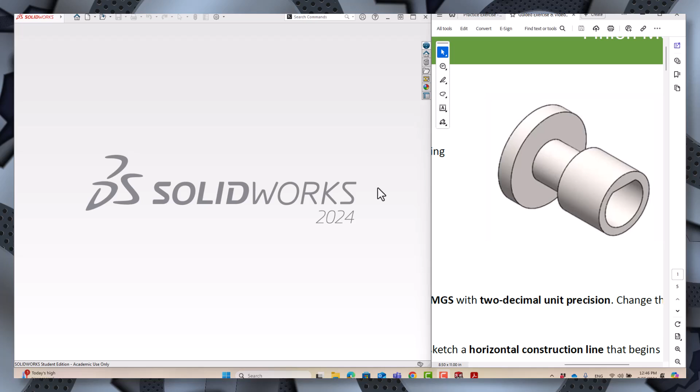Welcome again, MEEN210 class. In this video, I will be solving the parts exercises that I provided you during the last lab session. We will start with this part, the pinion mount. So,

as you see here, the part in itself is very simple. If we divide it into sections or features, let's say, we can divide it into 1, 2, 3, and 4 different features. There's this base disc, and then there's this intermediate cylinder, and this top cylinder, and then there's an extruded cut from the right hand side.

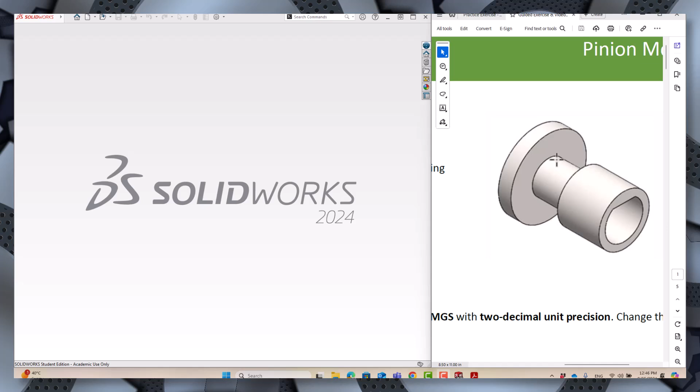As we discussed during the lab, there are multiple approaches that you can follow to build this part. One of them would be by sketching circles and extruding them one by one until you achieve the full geometry, and then on the right hand side face, you can draw this profile and then extrude cut towards the inside. Although this approach will require that you make the part using 4 different features.

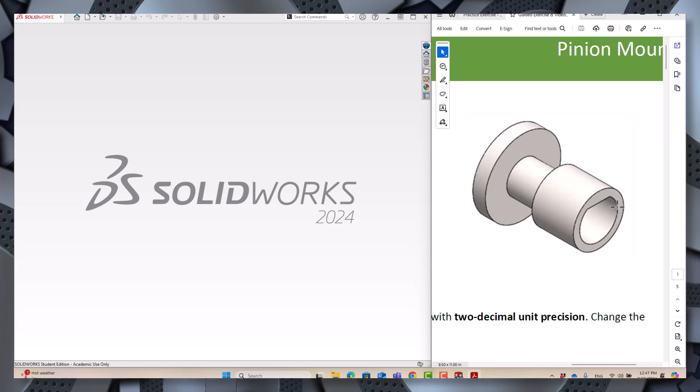There is another faster approach, and this would be by using a revolved sketch, like what we discussed during the lab session. So if you draw half the profile or half the cross section of this part and you revolve it around the longitudinal axis, you will get the exact same result just in one feature, and the last thing you need to do would be the extruded cut. So let's get started on doing this. So we will be doing this shape.

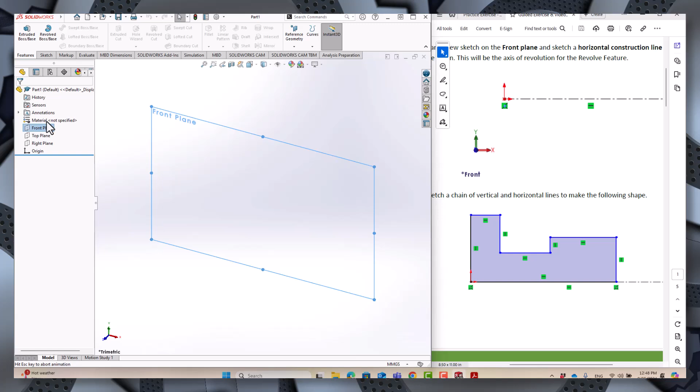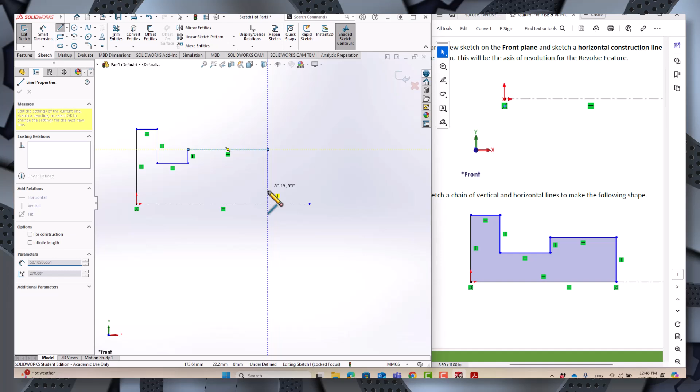I'll go and start a new part. You need to make sure that the unit system is the one that's required, and in our case it's MMGS, or millimeters. And I will pick the front plane. I will start a new sketch. And I will start by drawing my axis of revolution, which will be defined by a center line. Next, I will use the line tool to draw the profile approximately. Then, as usual, we will refine it using the dimensions and relations if needed.

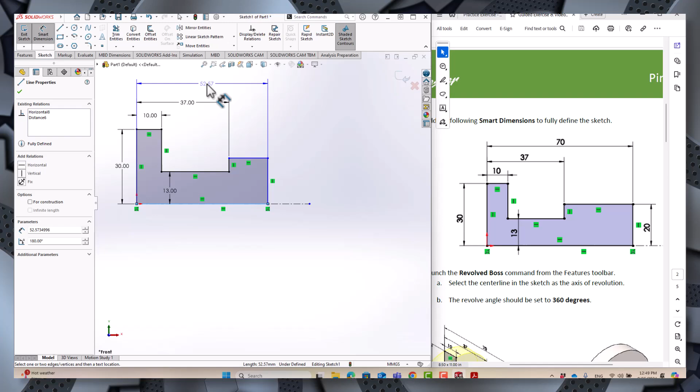So here is a closed profile, and on the next page you will see all the dimensions, and I will simply replicate those. This is 30, this is 10, here 13. And as I always emphasize, please try to put the dimensions on your sketch in the same arrangement and also in the same place if possible as the ones provided in the drawings, because this will make it a lot easier for you to review and spot if you have any mistakes or any missing dimensions.

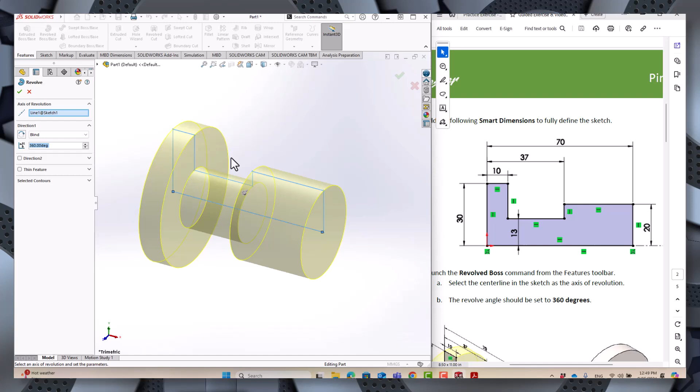Okay, so here I think our dimensions are fine. Our sketch is fully defined. We can exit, select revolve from the features. It will show us the preview. If you accept this result, you can click OK, and here is the part.

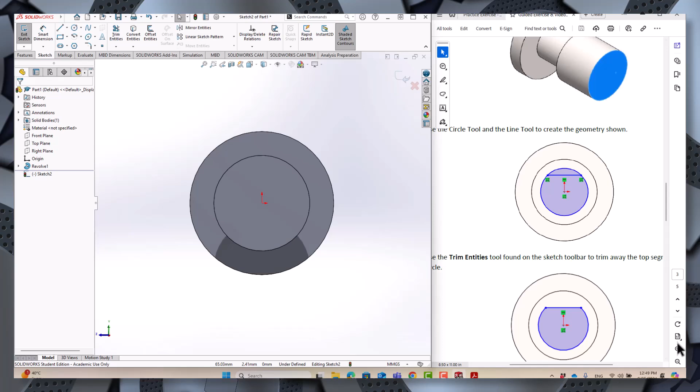The next step would be picking this face and starting a new sketch, and we will need to draw this incomplete circle. So we'll draw a circle, and then we'll draw a horizontal line touching the circle perimeter on both sides. Then we will trim away the unneeded part of the circle.

So with the circle command active, I will touch the circular edge of the face, and this would highlight the center point. Then you can go and click that center point to snap the center point of your new circle to it, and then go to the line tool. I will start from one side towards the other side, and I was careful enough to follow the horizontal guideline. So here my line came out horizontal. If the horizontal relation was not automatically added, you can simply select your line and make it horizontal.

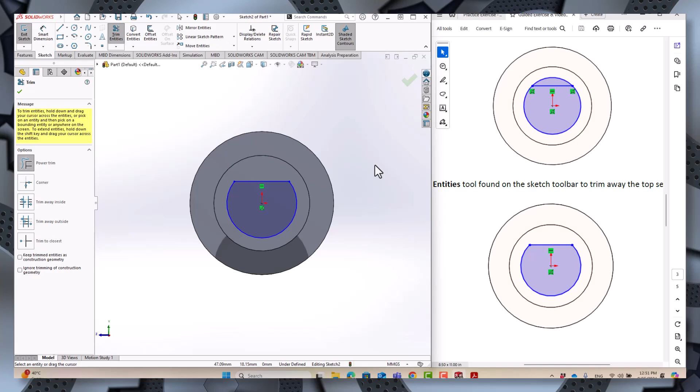Then I will go to the trim entities tool, and I will need to delete the extra part or the top part of the circle. And I would do this with the power trim selected. I will click outside in the background and then cross the arc that is not needed. And this would give us the shape that is required.

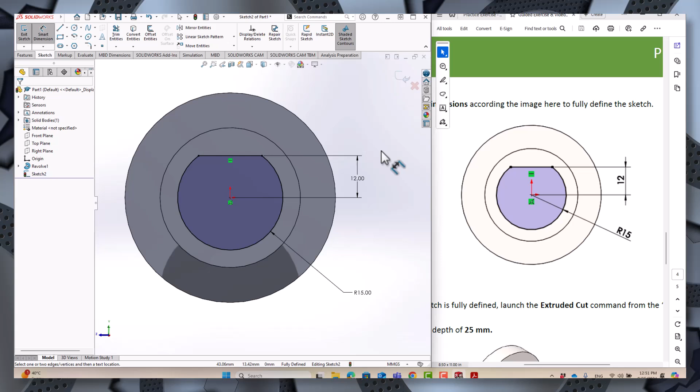The final step would be adding the dimensions to this sketch. So we have the radius here of the arc equals 15, and the distance between the horizontal line and the center point is 12. So with the Smart Dimension tool, I will add a radius of 15, and I will add the distance from the line to the center point as 12. Sketch is fully defined. We can exit.

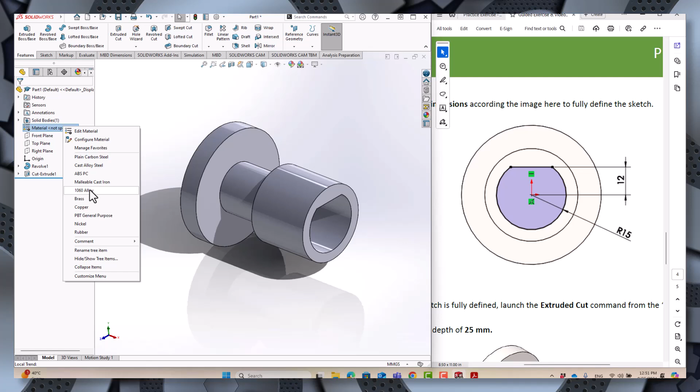Now we need to remove material with this sketch, so I will extrude cut with a depth of 25 millimeters. And this would be our final completed shape. For a self-check, apply a brass material. So go to the materials line, right click and select brass from the favorites. Don't worry if your part looks a bit different than mine. It's fine. These are some graphical differences.

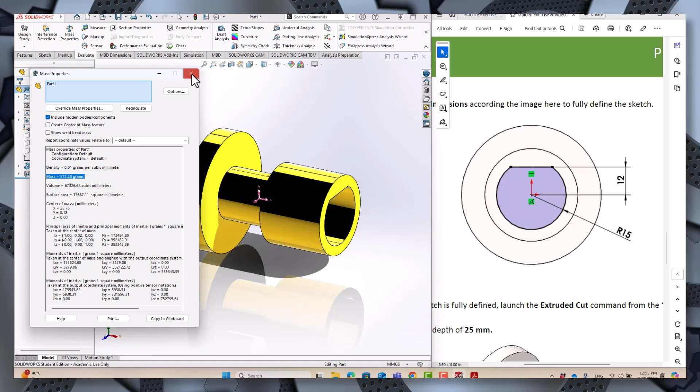So after applying the material, we go to the Evaluate tab, select Mass Properties, and make sure that your mass is 572.28 grams. If you got the same mass, then you have followed the steps correctly. And this concludes the steps to create this part. I hope it was clear enough.

Moving on to the next exercise, which is the pressure disc. This is the required part to build. It's a fairly simple shape, but slightly different. Our previous part was a solid part with a straight extruded cut, but this part is a hollow part, like a cover.

What is common between this part and the previous one is that both are round and both are symmetric about one of the axes, which means it makes sense to create such parts using the revolve tool. Imagine a center line or axis passing vertically through this part, and we can easily draw one half of a cross section and revolve it around that center line.

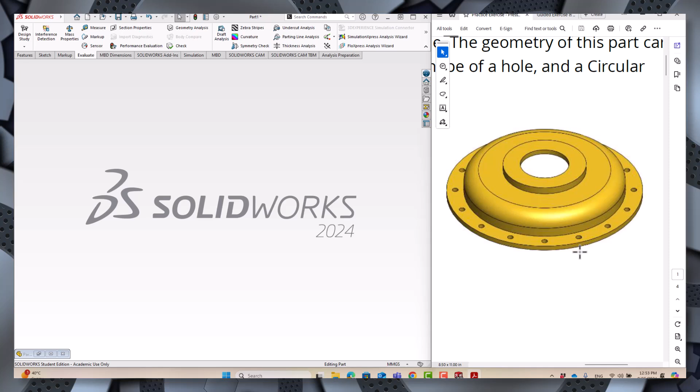But first, let's think about what dimensions or information we need to create this part correctly. We will need the diameter of the inner hole, the diameter of the second hole, the diameter of this cylindrical face, and the outer diameter. We also need the height, the thickness of this part, the thickness of the flange part, and the information about the small holes.

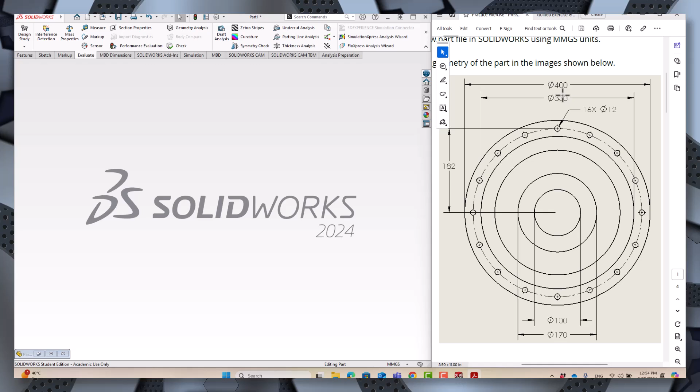If we scroll down in the document, we'll see a few images with some information. Here we have 1, 2, 3, 4 diameters, which are the 4 diameters we need. We also have information about the small holes, listed as 16 times a 12 millimeter diameter, meaning we have 16 copies of those small holes equally spaced around the part, each with a diameter of 12 millimeters.

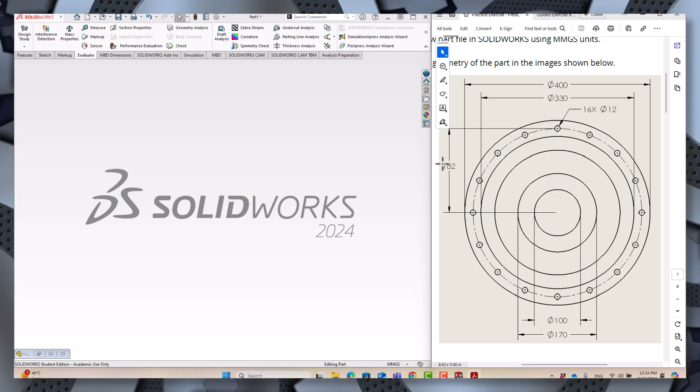The center distance between the small hole and the center hole is 182 millimeters. On the next page, we have two side views. One is a complete side view, and the other is a section view. The complete side view has the total thickness of the part, the thickness of the top cylinder, the radius of the outer curve, and the thickness of the flange.

The lower drawing is a cross section of the part, showing exactly what we need to sketch - only one of those shaded sections. It also shows that the part is hollow, and the wall thickness of the body shell is 10 millimeters. Since all of these are 10 millimeters, this means the line that defines the inner surface is parallel to the lines that define the outer surfaces.

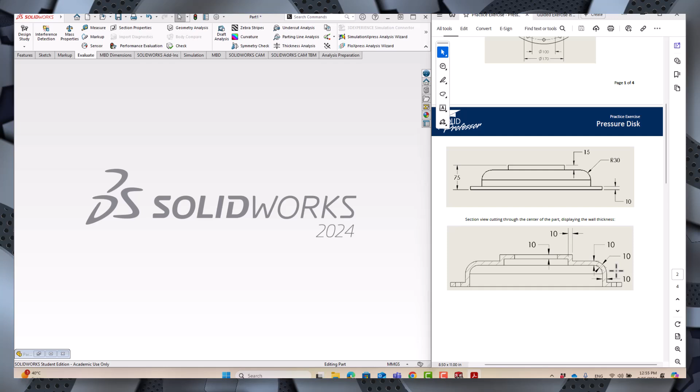Okay, so with this information, let's get started building this part. I will use this sketch, which represents half of the cross section, and draw that in my sketch. I'll start a new part, make sure we're on millimeters system of units, select the front plane, and start a new sketch.

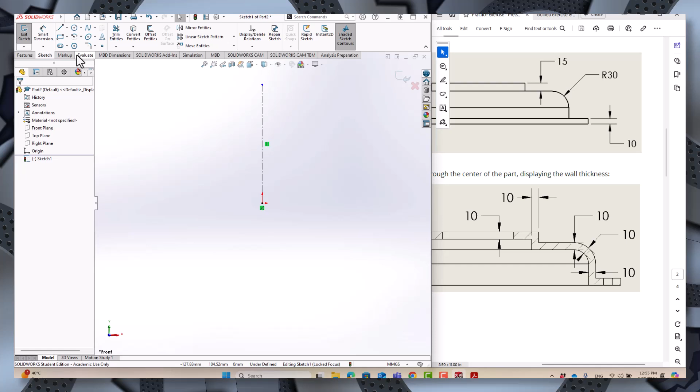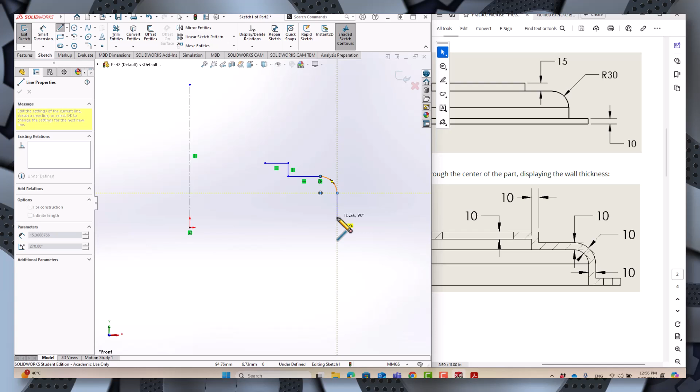I will begin by drawing my vertical axis of revolution as a center line or reference line. Then I'll start drawing the bottom set of lines that define this profile - a horizontal line, a vertical line, another horizontal line, a tangent arc, a vertical line, and a horizontal line, then exit the command.

The next step is that I need to create another copy of this same exact sketch, but 10 millimeters above or below it. You can do this manually, but then you'd need to add the 10 millimeter dimension between each two similar sketch entities, and this is just a time waster.

The faster solution is to use offset entities. If you remember, offset creates a copy of your sketch or multiple sketch lines that is parallel to your original sketch at a specific distance and direction that you define. What I need here is a copy of all these sketch lines placed 10 millimeters above my original sketch.

With the offset entities command active, I'll define the distance already predefined as 10 millimeters, and make sure select chain is selected. Select chain means that as you click one element of these sketch lines, it will select all the connected sketches at once. You can see the yellow preview, but in this case I need this to be offset towards the outer side, so I'll reverse the direction and accept.

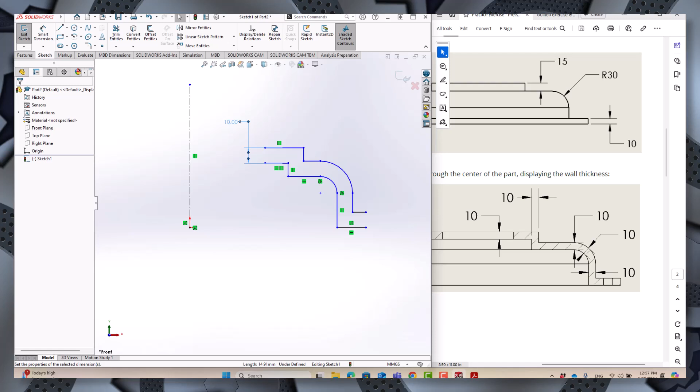Now we have an offset copy of our sketch towards the outside. Finally, with the line tool, I will close the ends of this sketch, and now my sketch is complete. It needs to be refined using dimensions.

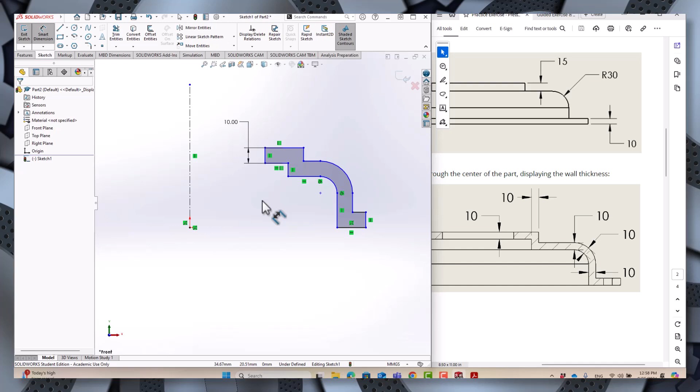Using the dimension tool, I will start by adding the dimensions that I see in this side view image. The thickness of the total part is 75 millimeters, so I'll pick the top and bottom lines and add a 75 millimeter dimension. Then the thickness of the top part is 15, so I will make this 15.

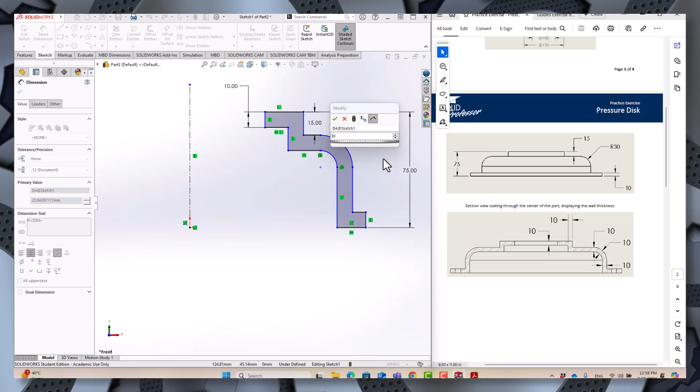The radius of the outer curve is 30, so make sure to pick the outer curve. Be careful when selecting lines or curves - do not select the points, select the lines or curves themselves. This has a radius of 30. Let me undo this for a second - I need to pull this out a little bit because as I change this to 30, the line disappears.

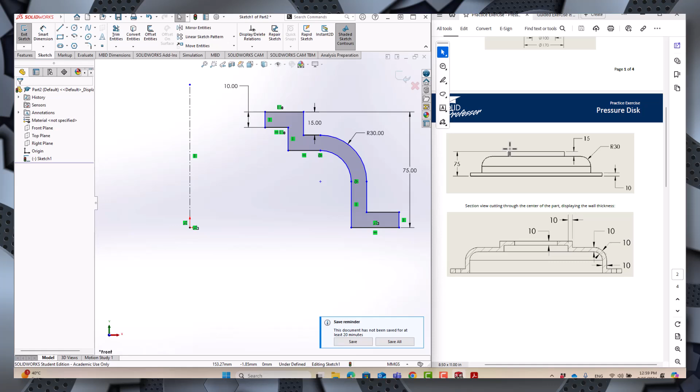Now I've added all those dimensions. The remaining dimensions would be the diameters. I will start by adding the outermost diameter, which is the 400 millimeters that defines the diameter of the outer edges. So I will go to the Smart Dimension tool.

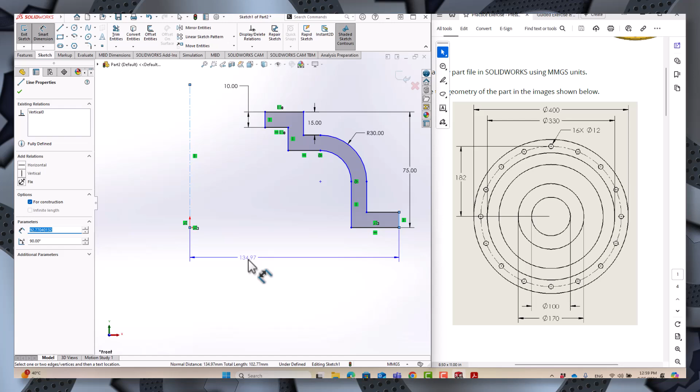This line defines the outer edge of the part. Again, make sure you select the line, not the point. I will add the dimension between that line and the center line. If I want this to show up as a diameter, you simply cross the center line towards the other side, and you will see that the dimension shows as a diameter, and add its value as 400 millimeters.

Next, the second bigger diameter, which is the 330 millimeters, starts from this side towards that side, which is this line. I will go towards the center line, cross to show it as a diameter, and then add 330.

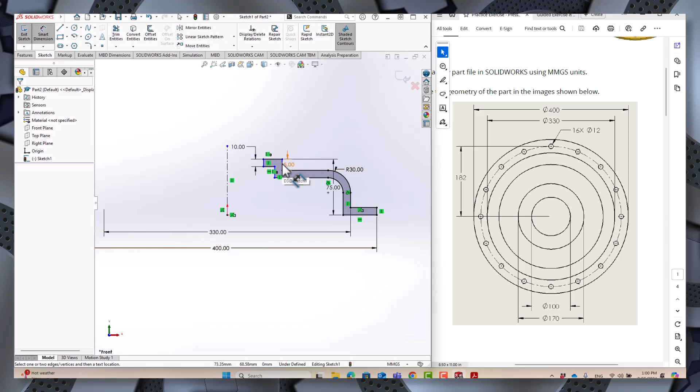The next diameter is the 170 millimeters, which is the small cylinder on the top. This will be 170. And finally the inner hole, from here to here, and this is 100.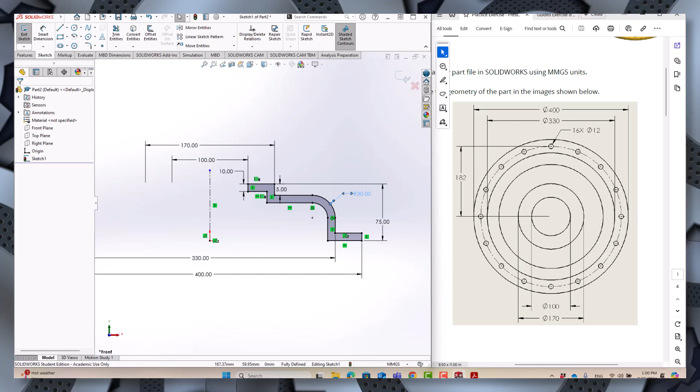As you see, the sketch is now fully defined. It has all the dimensions and all the required relations. Now I will exit, go to Features, Revolve, and you will see the preview, which is correct.

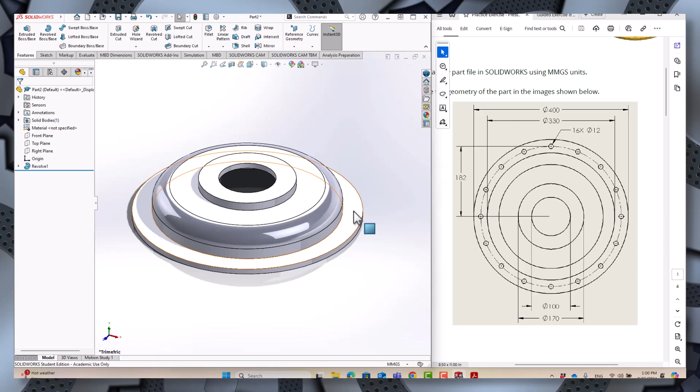I will accept. The next step is adding those small holes. So I'll pick this face and create a new sketch on it. Let me just get rid of the shadows. For this, I will draw a large construction circle and one of those small circles. Here's the construction circle - I'll make sure it's for construction, and next I will add one of those small circles.

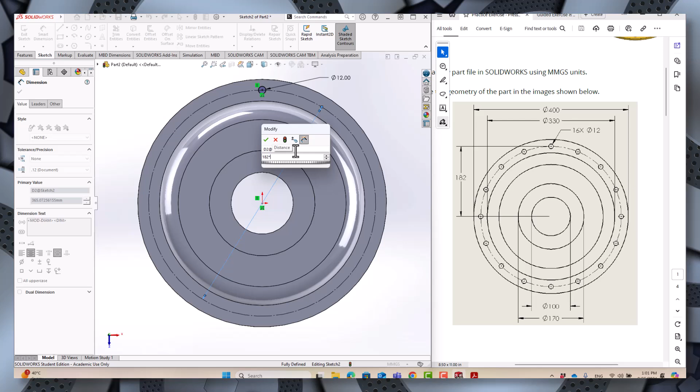Then I will add the diameter of the small circle, which is 12 millimeters, and then the diameter of the big circle, which is given here in the drawing as a radius of 182. So I will add the diameter, which equals 182 times 2. You can actually type it as an equation and press enter - it will do the calculation for you. Or you can right click on that diameter, go to display options, and display it as a radius if this makes you feel more comfortable.

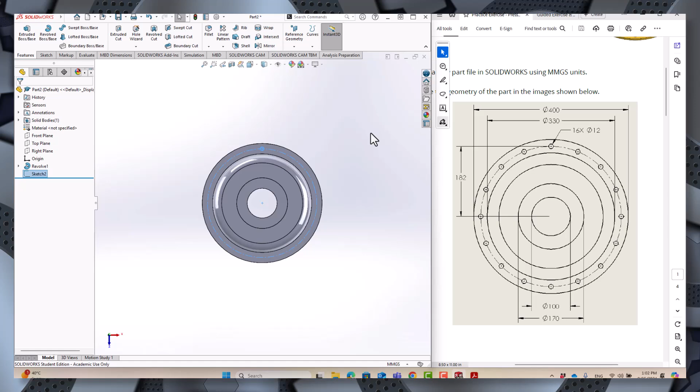Now you get a fully defined sketch, and you can exit. We are removing material, remember, so we go to extruded cut with a through all end condition, and this creates the hole. The next step is the circular pattern.

So we go and find the linear pattern button, click the arrow below it, and select circular pattern. Then we need to select the direction of rotation that we need to pattern around, which in this case will be the axis of the part. To select the axis of the part, you can simply select any cylindrical face on that part, because all of them share the same axis. So I'll select this face, for example.

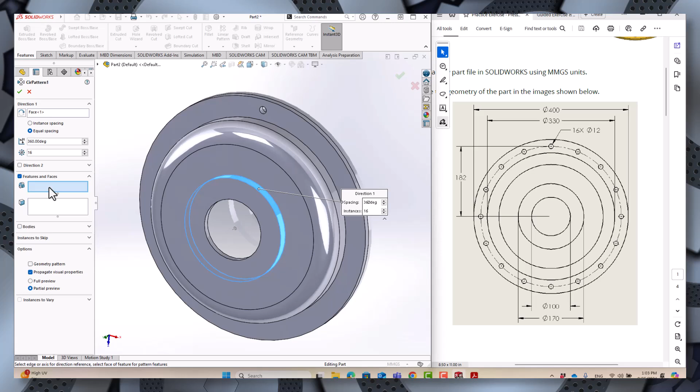I need 16 copies - make sure to type 16 and select equal spacing, because we need all 16 equally arranged around the circle. Finally, click inside the features and faces box and select the small hole. If you cannot select the hole from the graphics area, you can simply open the design tree and select the feature that created that hole, which is the extrude cut. Then accept, and you will get your completed part.

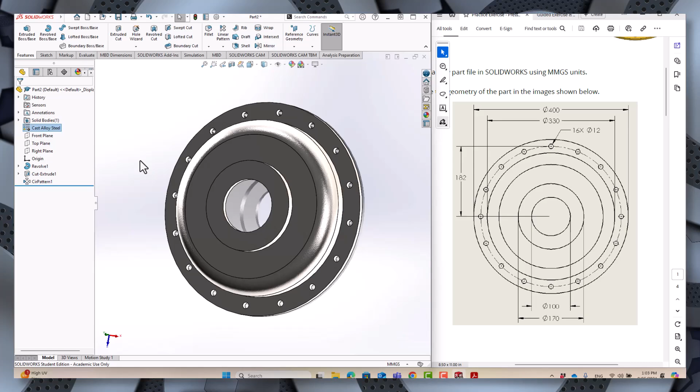Finally, as a self check, apply a material. Let's add, for example, cast alloy steel material. Here's a nice textured material. Again, don't worry if your part looks slightly different than what you see on my screen.

Then we go to evaluate, mass properties, and the mass is 11,878.14 grams.

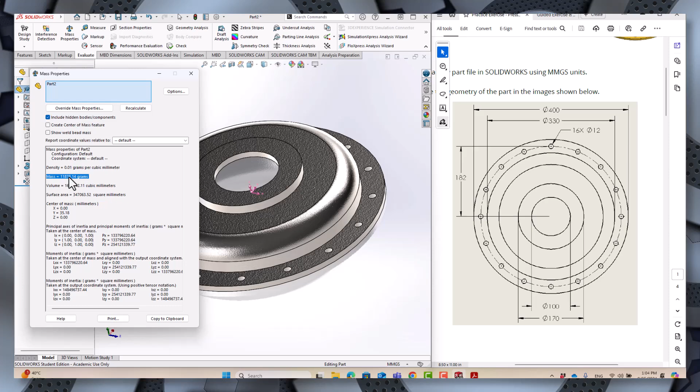I hope this video was useful and helpful, and please watch it completely and try to build the parts on your own, hoping you can get all the features and commands without any issues, inshallah.